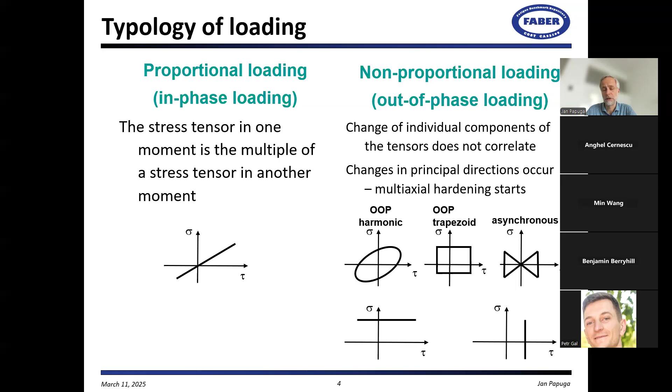This is out-of-phase loading with harmonic load channels. This could be, for example, a 30-degree phase shift between both sinus waveforms. Here you see a trapezoidal course, for example, again out-of-phase loading.

But the loading can be technically in phase, but for example, one load channel can be 2 times quicker, which is something called asynchronous loading, and this is the example here of this butterfly. But even this loading called asynchronous is something which is non-proportional, because if you try to analyze more cycles in time, you will find out that principal directions are changing during such a simple loading. Just one is static, one is dynamic, and you are getting something which is not anymore proportional.

What it causes is that the fatigue response is getting, say, weird, different. What I will be showing to you today is basically focused above all on analyzing multiaxial fatigue strength, because I deal above all with high cycle fatigue. In that moment, if we have some equivalent stress to our multiaxial loading, technically we have a fatigue curve, an SN curve. We could get to fatigue life.

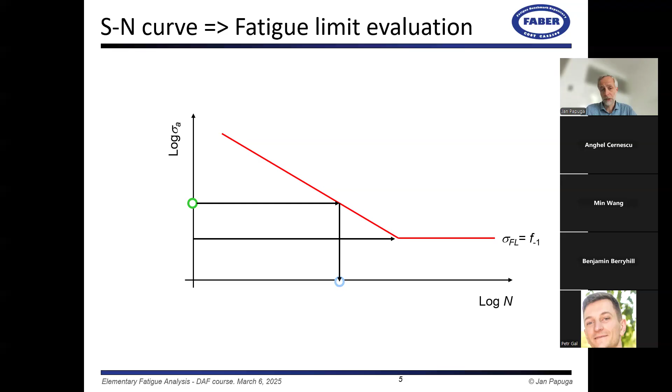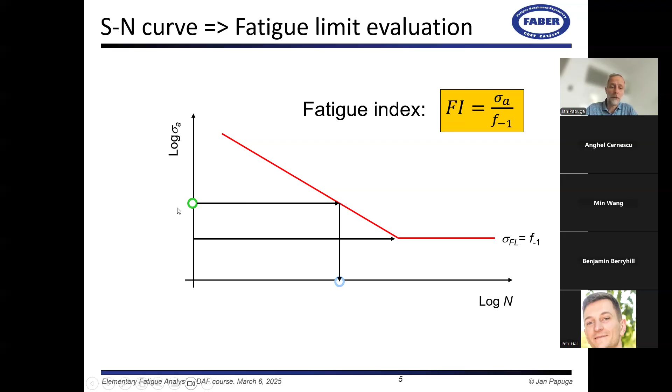But in our case, because we will deal with fatigue strength analysis, or more specifically fatigue limit, we expect that the loading which is applied to the structure will be identical to the equivalent fatigue limit. That means I will look for a case where the loading would be capable of reaching the fatigue limit. But if I miss that point, I go with larger stress amplitude. I can define something which is called the fatigue index. It's a ratio between the applied stress, some equivalent value, and the fatigue limit here.

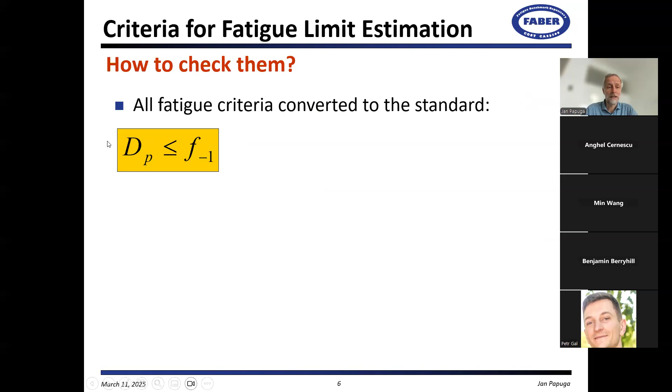Now, I will show you my experience with validating and testing very many different multiaxial fatigue criteria. For that, I had to build some practical means of comparison. So if we design to fatigue limit, to infinite fatigue life, if it exists, we are checking that this damage parameter is in some way equal to or rather lower than the fatigue limit. Fatigue limit in our analysis will be related to some kind of axial loading, usually F-1, which means push-pull, bending or rotating bending.

Now, if we use experimental data which led the multi-axial test case to fatigue limit or something resembling fatigue limit, then I expect that this damage parameter, which is a composition of different stresses usually, is identical to fatigue limit. This doesn't happen too often. It doesn't happen nearly any time.

So that means we define something which is called fatigue index error. This is equivalent stress minus fatigue limit divided by fatigue limit. This is basically a relative error in fatigue limit estimation in the direction of stresses, not lifetimes.

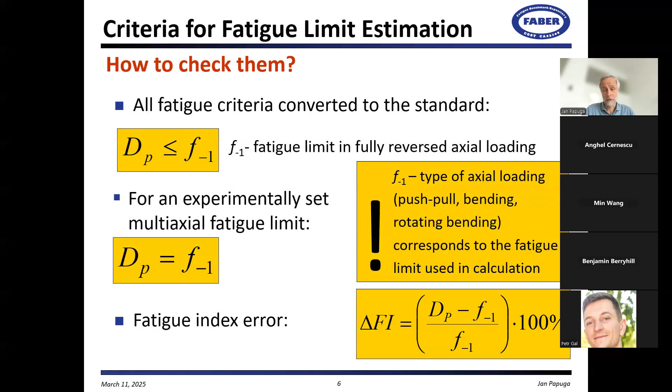Now, what we can do with that, once we have this metric of analysis, we can set across a large group of data what is its average value, what is the range, what is the standard deviation, to show how scattered the results will be compared to perfect results.

Average value is interesting. Delta FI larger than 0 will mean that the prediction is conservative. If it is smaller than 0, it's non-conservative. And this statistical evaluation can be done on different data sets.

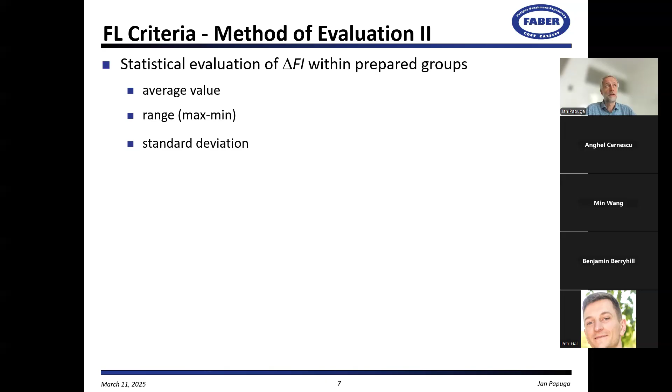For example, here you see classification of the original data set of all experiments into cases with no mean stress, mean stresses with axial and torsion loading channels active, or biaxial loading, and so on. In that way, I can compare average, range, standard deviation, and so on.

But if I look at the data overall, meaning only in this column all, I can also generate, for example, a histogram of fatigue index error. And it shows, okay, for example here, with fatigue index error between -5 and +5, I would get something like 50% of all data, of all results, of all predictions.

Technically, we would be quite happy if, based on Papadopoulos' proposal from the 90s, we could get all our prediction results to the scope of something like -10 to +10%. That would be an awesome quality of fatigue strength prediction. This doesn't happen for any criterion today.

And we are still speaking about estimation in stress direction. That means if we exceed the fatigue limit by 10%, it can have a profound implication as regards the final fatigue life, for example.

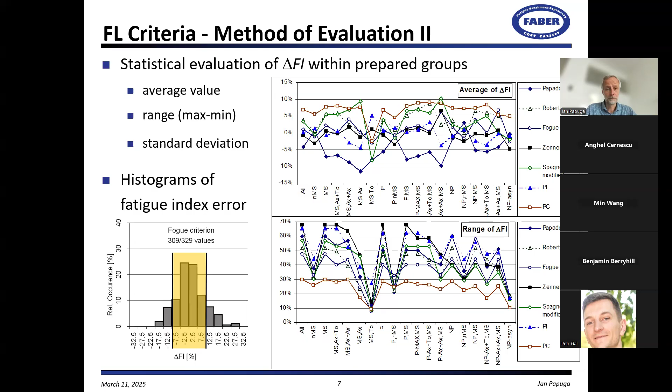Because I dealt with these analyses for a long time, I generated a website representation of all data I had at that moment. This is the PragTic experiments.php website. There is some kind of evaluator.

This is not active computation, just data from analysis in practice using different multiaxial fatigue formulas gathered here. You can use some preselection or just some of the data and look at what the response is, which can be useful for you if you have some specific industrial case to deal with.

The issue here is that this large set, something like 450 experiments, was later checked by me, and today we have a much better representation of a data set which is smaller, something like 300 data items.

Mostly because we have found out that part of this experimental data is based on experimental results provided in weaker quality.

We are not sure if there were some errors. We are not sure if there are trends which should be monitored. For example, the SN curves are built from just 3 specimens, for example. So such cases were abandoned, and today the final data set is smaller.

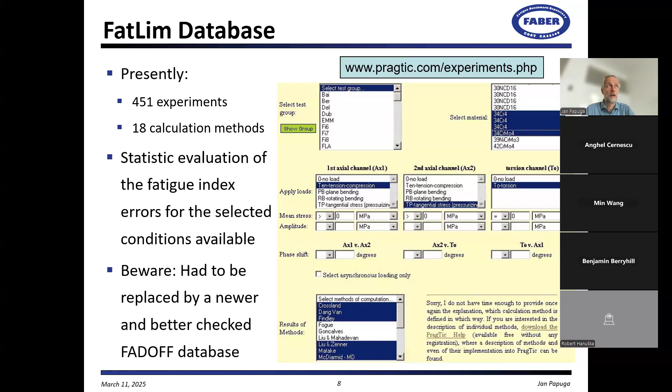Now, if we deal with multiaxial fatigue, we are looking for a way to convert the full tensor, or just 2 stress components from a tensor, to some equivalent value which we can say is equivalent fatigue strength or stress, or some compound value which I can compare with, for example, Basquin formula to get fatigue life.

As engineers, we are tempted anytime to use those simple solutions. For example, here for signed von Mises stress. Von Mises, everybody knows what this criterion is for static analysis of more complicated stress states.

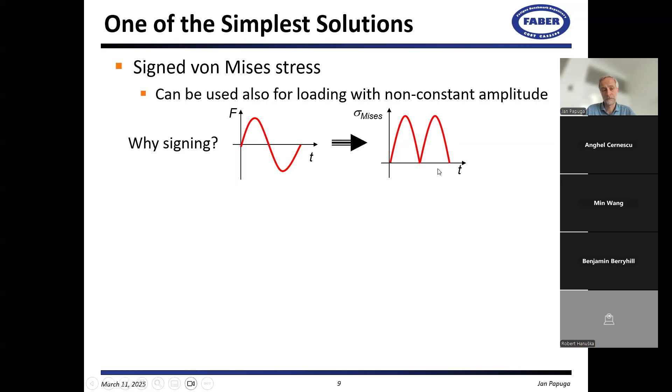The issue with it is that the product is under a square root, which means that if you apply it to a stress, to a load signal which is symmetrical around 0, we will end up with a stress signal which has non-zero mean stress and half the amplitude. So because of that, some kind of signing has to be applied.

Here you see cases where, for example, it is signed by the first invariant of the stress tensor. The trace of the matrix or tensor is computed, you check what is the sign, and based on that, you set the instantaneous value of the signed von Mises stress to some modified value with an asterisk.

In Nastran or in other cases, you can also use other ways of signing, for example, by the outermost principal stress. If it is more compressive or more tensile, you can select the sign here.

Once you have the amplitude and mean value of the stress cycle over the period, you can use some kind of mean stress effect. For example, here I proposed the Walker formula.

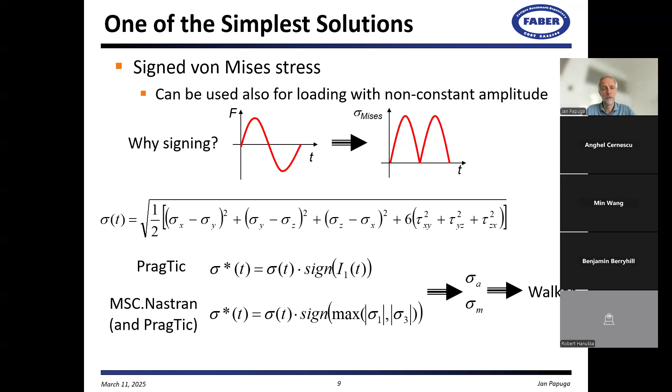And here we can see what is the general outcome. For a large data set of more than 400 experiments, we have tried to build a histogram, and you see that basically it's extremely low.

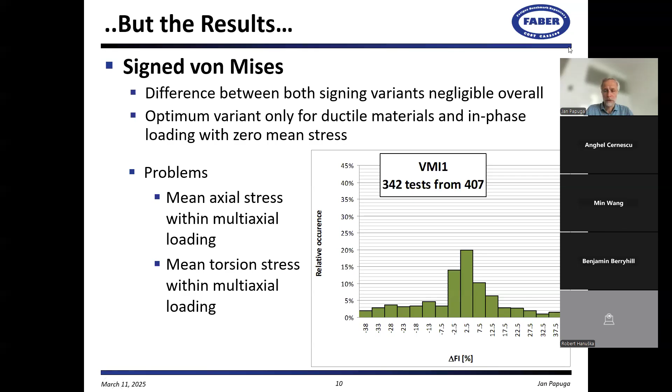For the other half of the data, about 200 specimens, we get results much more off from the perfect results. In some cases, something like 1/6 or 1/7 of all the data lies out of the box, out of -40% and +40% of the fatigue index error. That's already something not applicable. With such huge errors in stress estimation, that's basically equivalent stress estimation, nothing else. You cannot proceed with a computation on which somebody is relying.

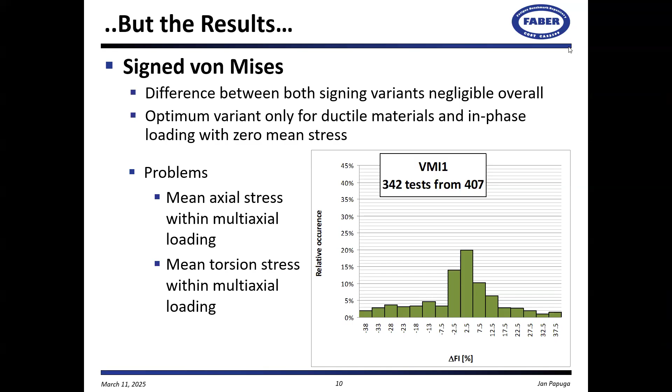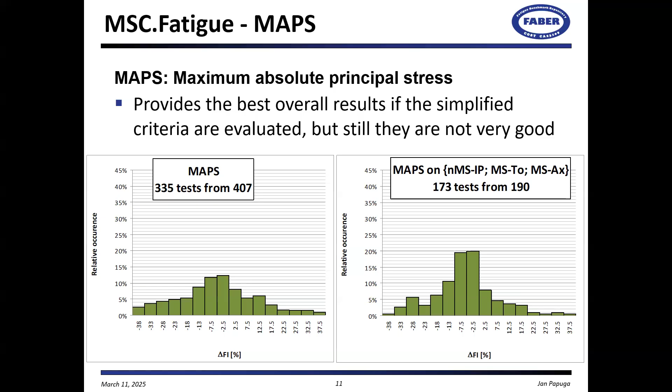Now, if we dig deeper into the problem, we can say any component, when it is loaded by a few specific load modes - this can be torque, bending, axial loading, push-pull - whenever I combine these effects, it's very likely that on the surface of the component I will get the maximum stress. So technically for me, it means that if I want to analyze the fatigue life of a component, I should focus above all on the surface.

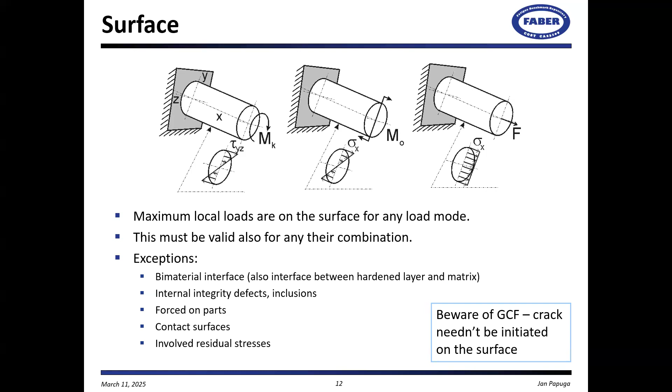There are exceptions - interfaces, integrity defects, forced-on parts because of how the surface is loaded. That means also contact surfaces, or any cases where there can be residual stresses. I also wrote to take care of gigacycle fatigue, because there the crack could be initiated out of the surface. So that means the surface is something interesting for us in multiaxial fatigue analysis.

If I check the common state when it is a non-loaded surface, it means that the normal stress in the perpendicular direction to the surface is 0. The same for shear stresses acting along the surface - here the shear stress will also be 0. So we have a plane stress state.

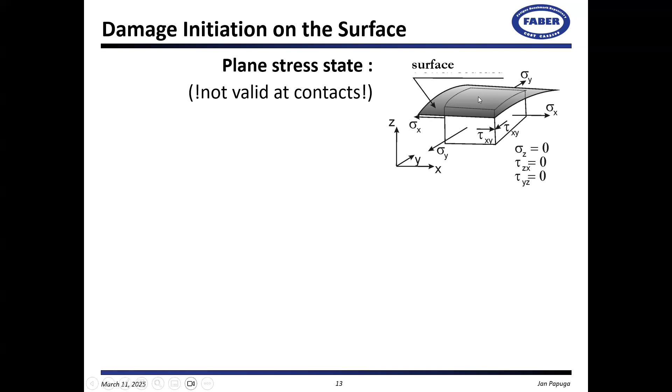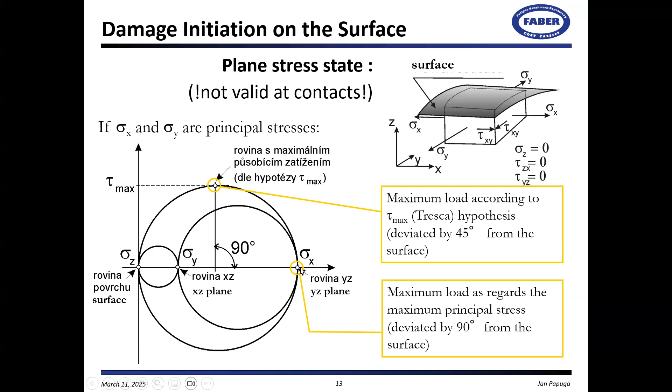So already now I have some expectation that there are specific planes where I should look for potential cracking. Because if I start analyzing, I can say that if the crack is very small, really tiny, just starting, it's of planar character. When it starts to deviate, it changes direction, but at the very beginning it's a plane.

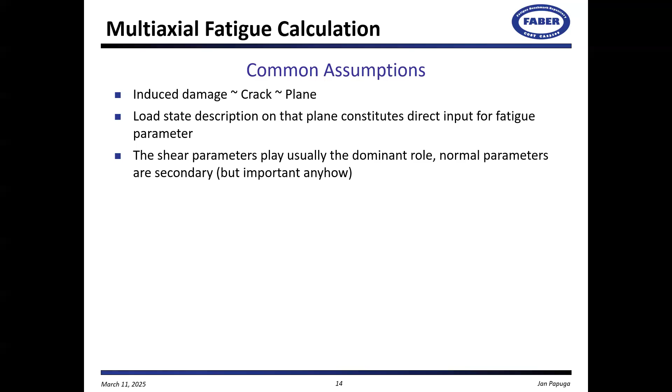That means the load state description on that plane should be the primary input for any analysis of fatigue damage. And what is important, the shear stress parameter usually is expected to play the dominant role. It is governing the crack calculation. But if there are any normal stresses acting simultaneously on that plane, they can have a secondary, still important effect.

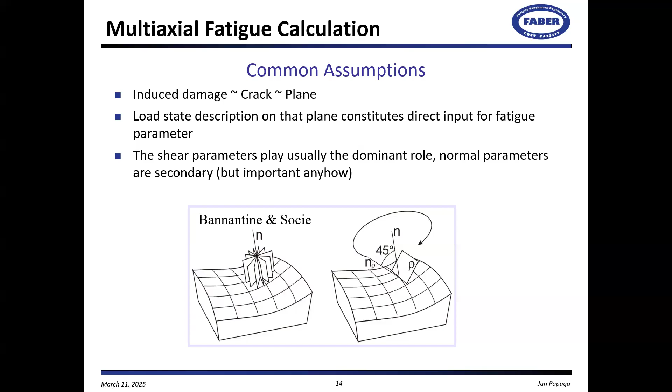Now, if I start to look at specific planes for acting stresses, again we have those two types of loading: proportional loading and non-proportional loading. For both cases, I have to split the original stress vector into normal stress and shear stress. For proportional loading, because it doesn't change direction, it means that not only normal stress but also shear stress is still running across the same direction. So it can change magnitude, but the shear stress vector will still point in the same direction or opposite.

In case of non-proportional loading, normal stress stays normal because that's by definition of the stress. But the shear stress can start to show in different directions because it changes its position or direction. And if the loading is periodical, it can happen that the endpoint of the shear stress vector will start to draw some specific closed shape. So shear stress starts to rotate.

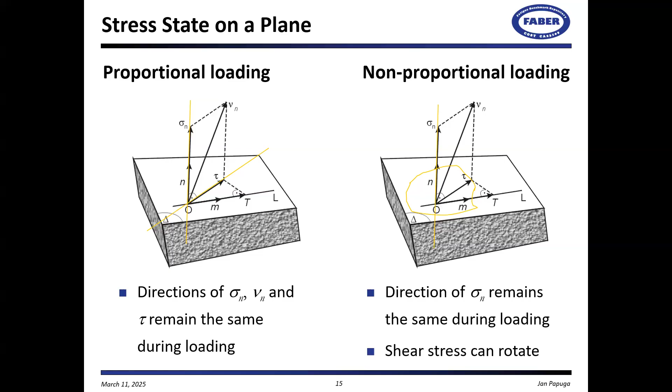And now, if you remember the previous slide, we believe that the primary role in fatigue damaging will be attributed to shear stress. It's of higher interest for us to know how to evaluate it correctly. There are different ways of solutions. This shape here is a set of endpoints of the shear stress vector.

The oldest solution was to make a longest projection method. You are simply looking at how to project this shape into a specific direction. From that, you will derive the shear stress amplitude here and here. And because this is a projection to a specific direction, only this is the shear stress mean value.

Then came a slightly better solution, because this one downplayed the role of the mean value of the shear stress. The second possible solution is to use the longest chord method. That means I'm looking for a pair of data points which produce the longest shear stress range, or half of it, the amplitude. When I find it, I say, okay, this is my midpoint, and to that the mean shear stress is pointing, meaning I can compute the mean shear stress more precisely than before.

There's a problem. There can be geometric shapes, for example isosceles ones, which produce different mean stress values based on a different chord of the same length. So today the most common solution is to use the minimum circumscribed circle method. That means you take the shape of the shear stress endpoints during the period, and you try to enclose it into a circle of the smallest possible diameter. So the radius of this circle is the amplitude of shear stress, and the midpoint of the circle gives you the mean shear stress.

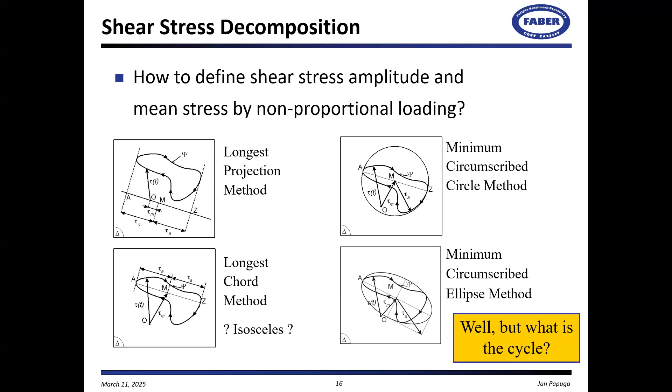The question is, I conditioned this analysis by the fact that this is periodical loading. How often in practice will you encounter periodical loading? That's not very common. It's good for experimenting, for verifying and validating methods, and so on, but in industry it's very uncommon. So the question still persisting here is how to get the cycles. Commonly in uniaxial space, we are dealing with rainflow analysis, meaning we have some continuous load history, and we will convert it into a set of discrete cycles.

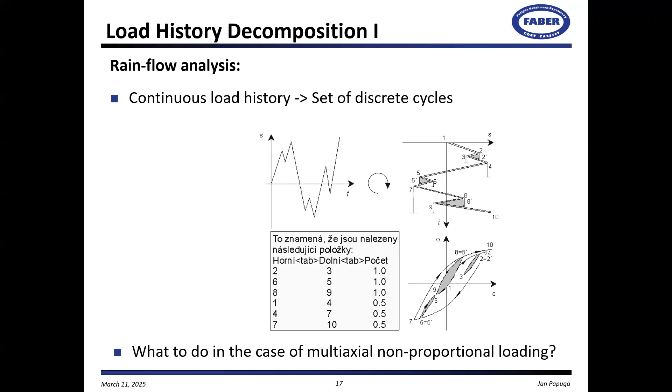The question is what we can do with non-proportional loading. As engineers, as we were prone to use von Mises solution or principal stress solution, the easiest way is to use the rainflow procedure on some projections, for example on normal stress, because it doesn't change direction, on the resultant shear stress pointing into a specific direction, or on some built-up equivalent parameter.

The question for me is, well, originally the idea behind rainflow was that in every closed hysteresis loop, we are enclosing some strain energy density, which is directly related to the damaging process. So that makes sense. But here we see projections into specific directions, and the strain energy density is enclosed just in that specific direction. The question is if the loops are closed at all, and how you recognize, in a multiaxial space of six components, that the hysteresis loop is closed.

There are more complicated methods. Currently I'm aware of two. One, a Wang-Brown solution from '96 - we tried to implement it, and we do not believe this is the best solution today, but it is the best solution because there is no other. If you are from industry, I would say that we do not have anything proven to work well for this part of the complete multiaxial fatigue strength, or multiaxial fatigue analysis, at all.

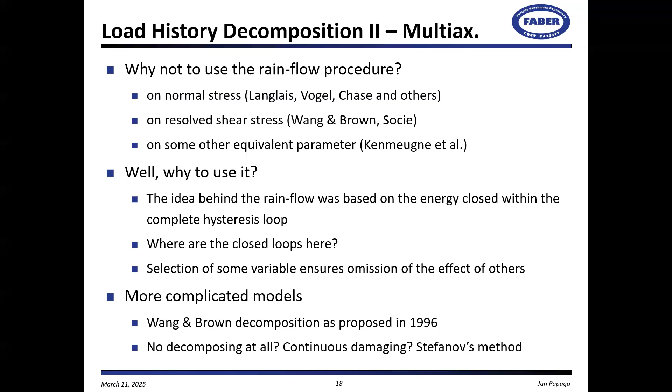So this is about different families of multiaxial fatigue criteria. One of them is the critical plane approach - basically, I check the damage parameter on different planes.

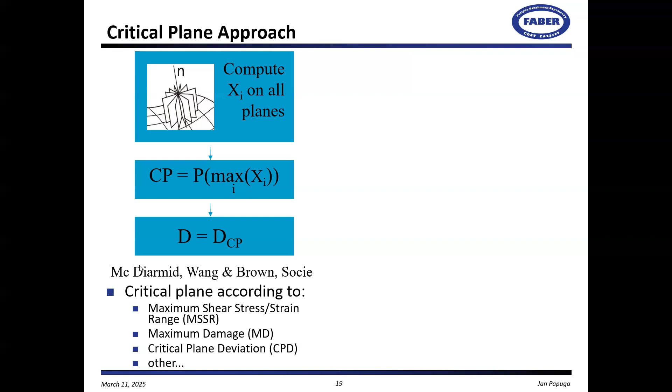There is another type of solution, the so-called integral approach. There, I compute the damage parameter, if possible, across all planes. That means I have to discretize in some way, and I make basically an average across all possible orientations of the planes, which is technically done by a space integral of all damage parameters across all planes.

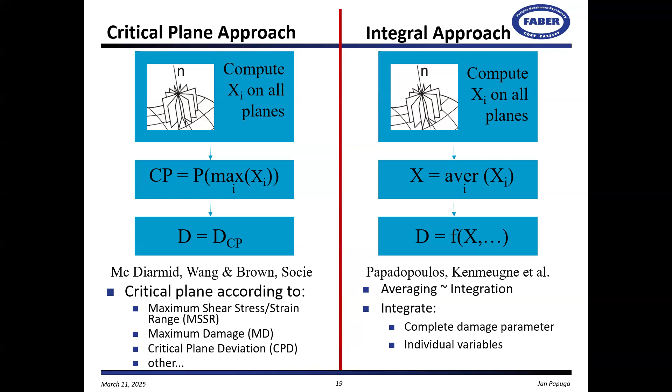There you see some proposals by, for example, Papadopoulos, Kenmeugne, and others. Averaging is basically integration. What is interesting today is that most practical implementations concern only the critical plane solution. The integral approach is still mostly related to research, and nobody is trying to implement it. My question for a long time was: why is it that way?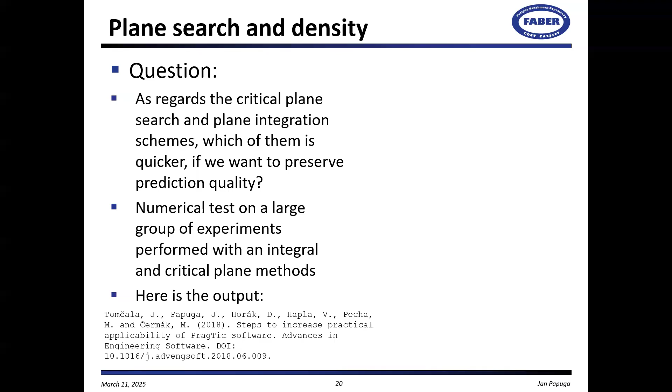We dealt a lot with that question, and at one point we did a comparative analysis, because for both concepts you have to go through different candidate planes. In one case, you are simply looking for a maximum value. In the other solution, you are integrating every other occurrence of the plane result with the previous values - you are averaging the content.

My expectation was that people can imagine the search for a critical plane solution is something easily optimized - you do some pre-scan, then dig deeper into positions where you see the current maximum, and based on some gradient approach, you can get to the peak, to the critical plane. For the integral solution, I cannot simplify it in any way - I should go through all the pre-selected planes and integrate everything together.

So I expected the reason why everything implemented today is the critical plane solution is because people expect the integral solution to be more complicated in terms of the requested time. We did this analysis with all the data we had, and here are the most representative test cases.

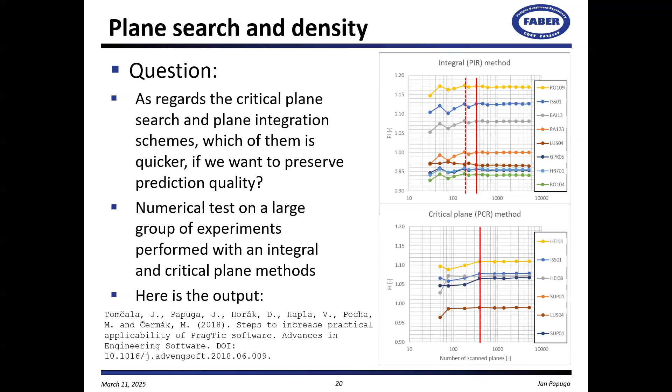Now, if we compare the critical plane solutions, the most frequent families of criteria are questioning what is the way to describe the plane as critical. One of them is to look for maximum shear stress amplitude. So I'm not looking for a damage parameter or some equivalent stress, I'm simply looking for a plane where there is the maximum shear stress range or amplitude.

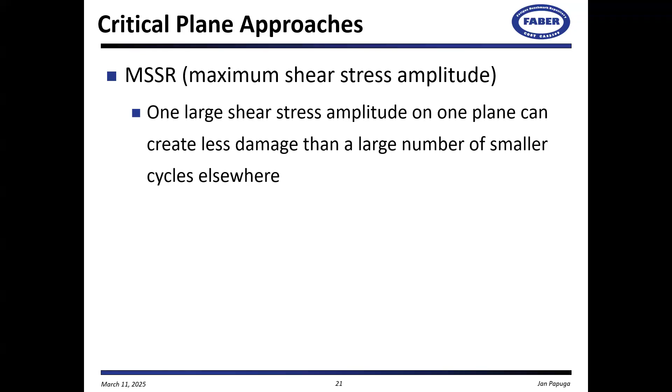The issue is that one large shear stress amplitude on one plane can be less damaging, the damaging effect can be much worse if I create less damage on another plane just slightly aside, but with many cycles. So for me, this concept is to be abandoned, despite that many people use it.

The other solution is maximum damage analysis, which looks for maximum damage parameter across all possible candidate planes. For me, this is the only acceptable solution because it's more realistic.

Anyway, if I compare a critical plane approach and integral approach, it's fascinating that they have such different philosophy. In critical plane approach, I'm looking for a shear maximum, only the maximum value is of interest for me. In integral approach, I integrate the damage parameter across all planes. So one would expect that the results of both types of criteria would be substantially different, at least for some cases. And I have to say that until this moment, we haven't found this distinction. If you have a properly set critical plane approach, you can get a very similar quality of overall results as for integral approach.

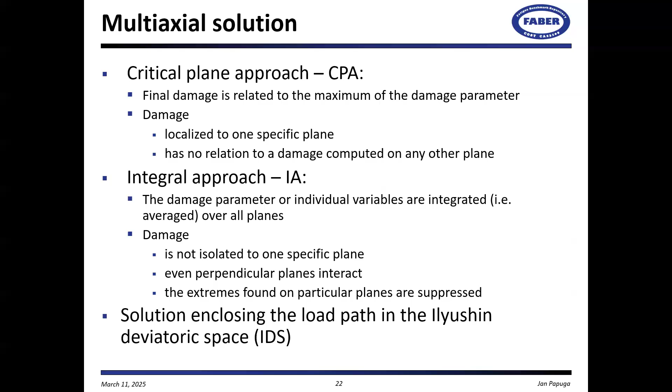That's something which is surprising and a bit bewildering. Then there is a third family of criteria which is based on enclosing the load path in the Ilyushin deviatoric space. I will explain it.

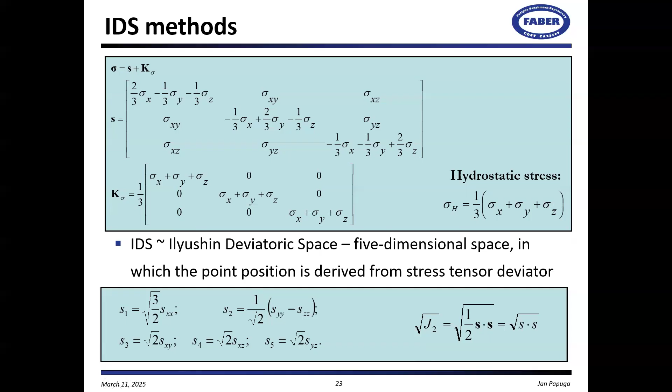You can split the stress tensor into two parts: one is hydrostatic stress, and one is deviatoric stress. If I transfer the deviatoric stresses to a 5-component space, as defined here, called Ilyushin deviatoric space, I can combine this second invariant of shear stress deviator with the hydrostatic stress in some way, in some weighted addendum, and use this as a criterion of fatigue strength analysis.

The advantage of this solution is that the critical plane methods and integral criteria require you to deliver results on very many candidate planes. If you have to use the minimum circumscribed circle algorithm, this is again some optimization routine, and it costs you a lot of time. But with Ilyushin deviatoric space, you have to use, for example, the minimum circumscribed hypersphere method algorithm, and you have to run it in 5D, in 5 dimensions.

But this is a common procedure which is simply mastered by computer, and you have to run it just once, compared to previous hundreds or thousands of evaluations in the previous case. So it's a much quicker solution if it would work well.

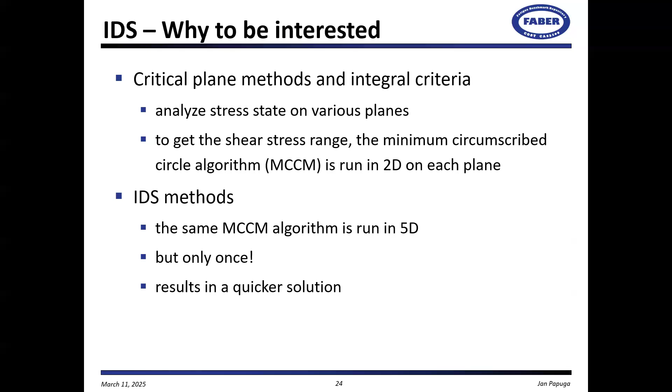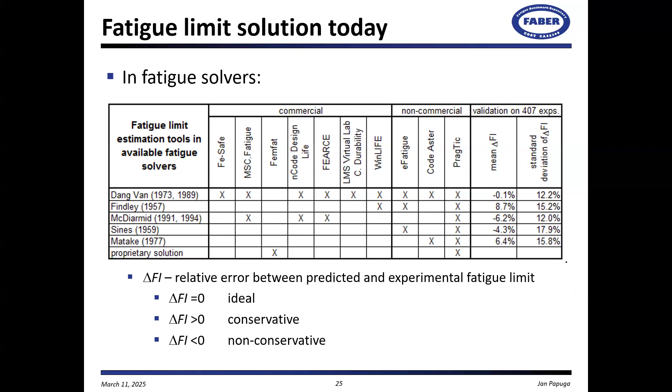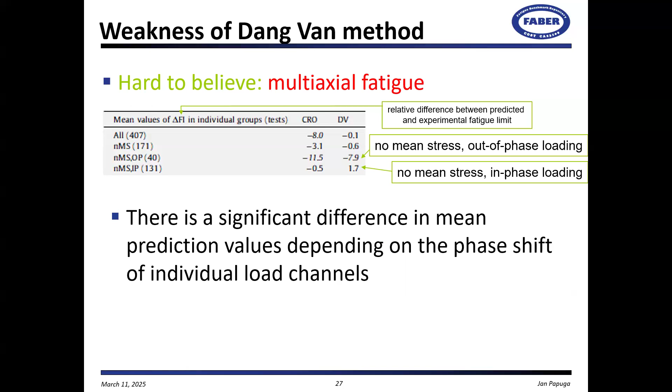And that's surprising. This should be a common tool for multiaxial fatigue analysis, but if you apply the basic condition of out of phase loading, you are generating substantially non-conservative results.

When I was presenting my analysis validation of different multiaxial fatigue strength criteria in Milano, 2009 or 2010, a colleague from there, Mauro Filippini, came to me and told me he knew about a perfect criterion from America: Manson-McKnight, which has very similar results to Dang Van.

So when I returned home, I checked that. It's basically very simple, technically a von Mises criterion, if you see that. But this von Mises criterion is not evaluated in every instant. Instead, you have to know what the cycle is. If you know where the cycle starts and when it ends, you run the analysis to get amplitude and mean value of every stress component separately.

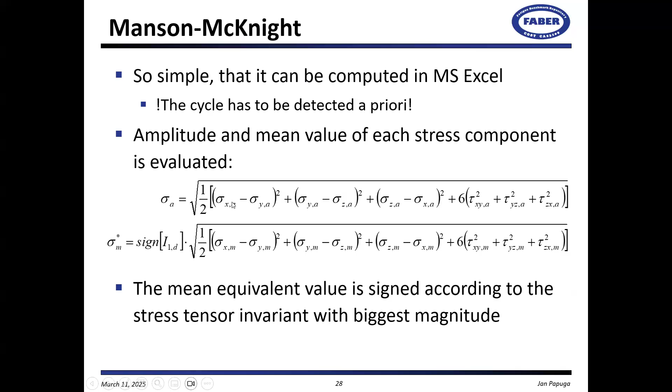And then you build the composite amplitude and composite mean value from these components in amplitude and mean values. And here you see the results - this is a comparison of the histogram of Dang Van and of Manson-McKnight.

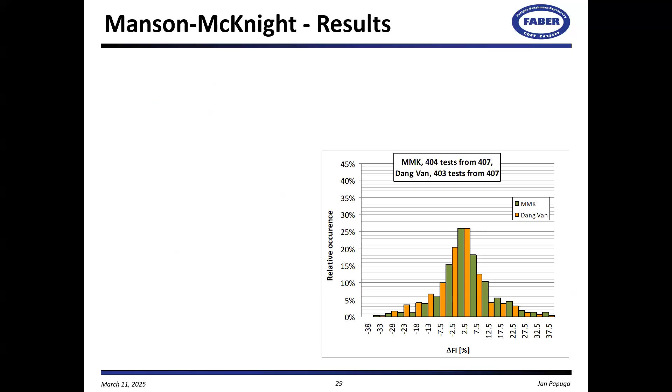Dang Van asks you for a quite tedious iterative algorithm, something to be implemented. Manson-McKnight can be solved in an Excel spreadsheet without a problem. Dang Van asks you for your time, or for 5,000 euros to buy it somewhere. Manson-McKnight doesn't ask for anything - well, you have to buy a spreadsheet calculator.

So technically, it's much better than signed von Mises stress, but it has some weak sides, some disadvantages, and you cannot know them unless you have a proper validation basis and benchmark set.

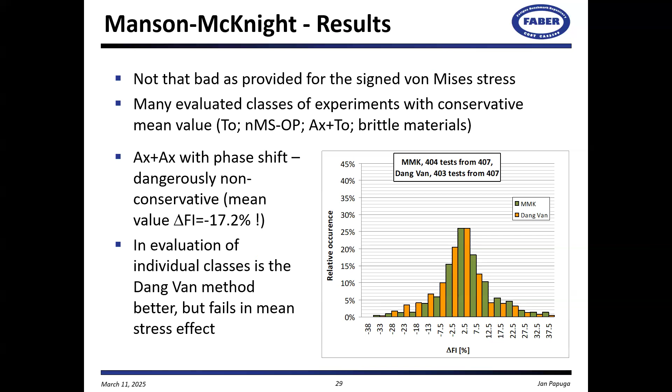I had that benchmark, so I ran analysis comparing Dang Van and Manson-McKnight in mean values, in ranges. This is the difference between both values in all cases, in ranges, in standard deviations. And based on that, I could see that in some cases, Manson-McKnight was a perfect solution.

For example, here I have a biaxial loading without any phase shifts. There, if I use Dang Van, I will be completely conservative in mean value, and I will have a large standard deviation in addition to that. But if I use Manson-McKnight, I get a moderate mean value of the fatigue index error, and much lower standard deviation.

So technically for pressure cylinders, it's a perfect tool without the need for very specific complicated fatigue analysis. But if this pressure vessel was set, for example, to move and generate more different load cycles - not just the pressurizing itself - you see that if I use the same concept of biaxial loading with non-zero mean stress and in addition with phase shift different from zero...

...Manson-McKnight criterion quality deteriorates very quickly to very ugly non-conservative mean values. And in that moment, I would be happy to pay for Dang Van to have it completely correctly solved.

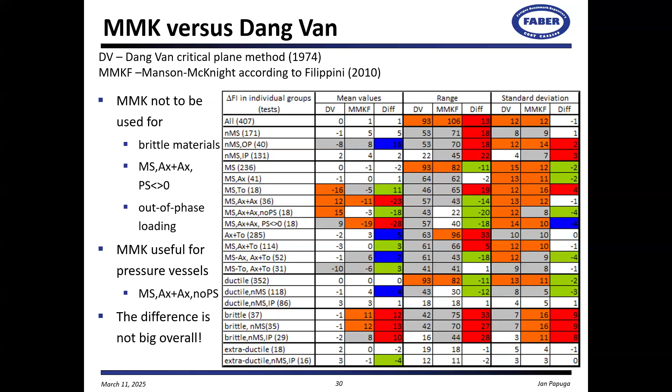So, well, Dang Van is today something to be implemented, something implemented everywhere. And the question is, if we cannot get better results. Just a small deviation here.

We tried to propose a better solution to supersede Manson-McKnight by the MMP criterion. You see that we end up with different results. But one of the guys here in this meeting has a much better solution, but he still didn't proceed to publishing it.

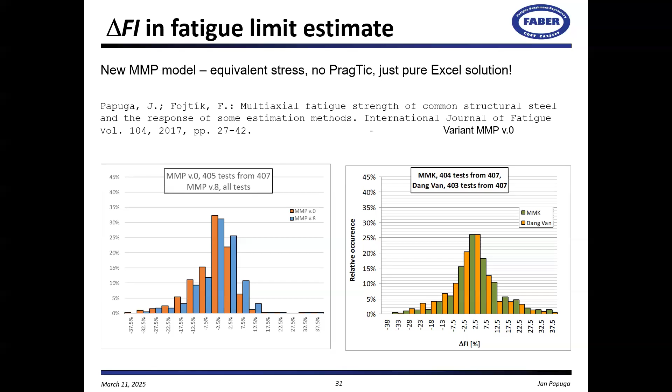Now, I just wanted to quickly go through other histograms of other criteria implemented today. This is McDiarmid. It's a combination of shear stress amplitude and maximum normal stress with some weights added in addition. And there are two different implementations: you can use it as a maximum shear stress range criterion or the maximum damage criterion.

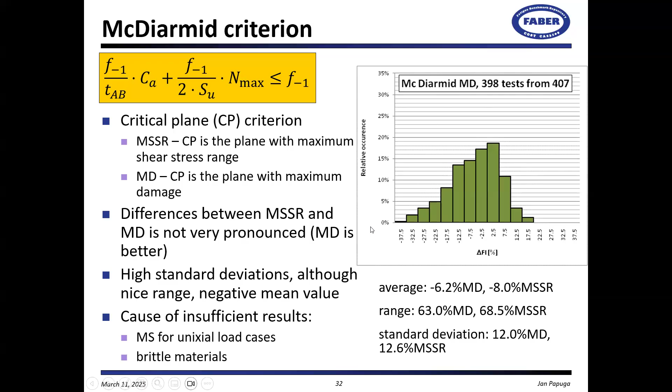Here you see the results of damage, which are better - maximum shear stress range, and here you see the parameters. Technically, it has better standard deviation than Dang Van. It has much smaller range, but you see that its average value is skewed to the left side, so it's more non-conservative than we would like to have it.

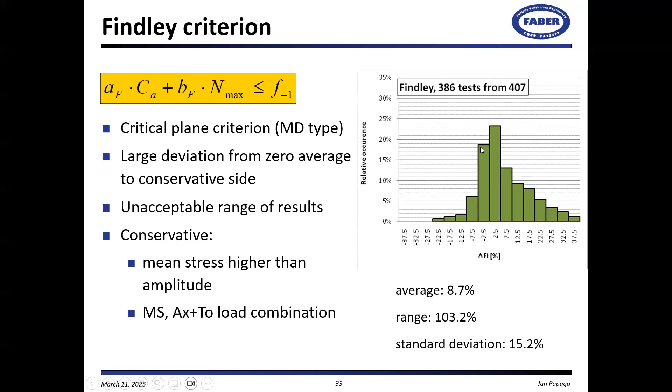And you see the results. I would say quite similar to McDiarmid, but with smaller standard deviation, but also again with two non-conservative mean values.

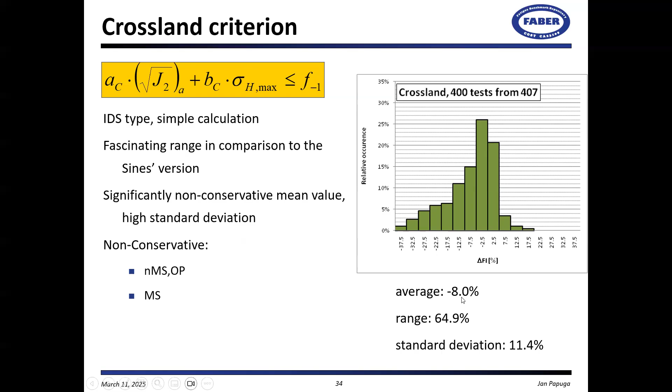And here you see something completely different. This is a criterion which I proposed now already 17 years ago. And I guess you immediately see that we are getting to standard deviations which are half of Dang Van's method. The range is also awesome, average very nice.

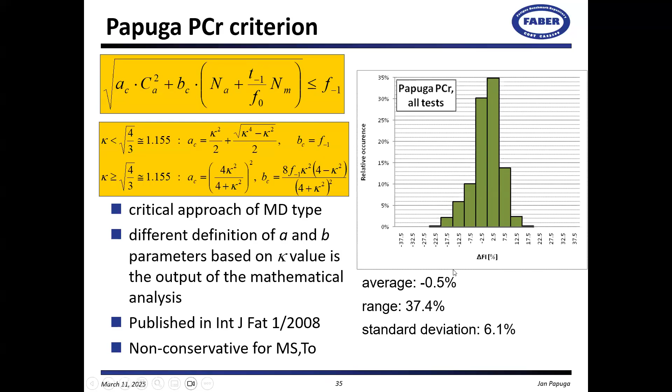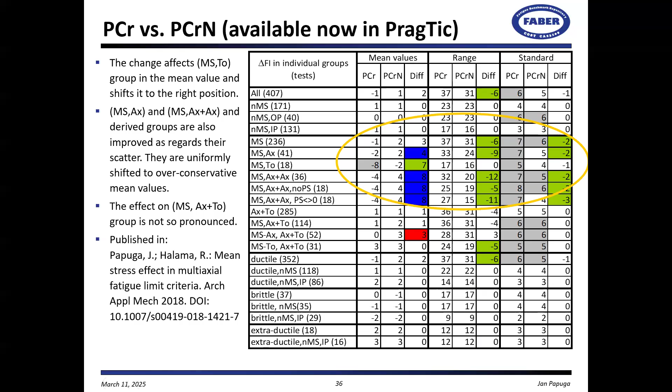It has some weak points, I will mention it later on. Meantime, we published here in this paper even an improvement, which allowed us to get to a standard deviation of 5 for the whole set, and to a range of results of 31%. So I was quite happy with that.

But a colleague of mine, André Böhme from Norway, came to me with a proposal for a joint paper, and during the discussion, he found out a bug. So whoever would like to use PCR or PCN criterion, take care.

Here you see common multiaxial load combinations for data tested by Anes and Reis. What he defined here as augmented sets is basically push-pull loading, the first case, augmented one, which is decreased to half of the fatigue strength, of the fatigue limit. So that means we would expect that with this loading, the criterion should result in 0.5 in fatigue index.

And then he did it with shear stress loading. Again, this is half of the shear fatigue limit. And then he did it in the opposite direction, and he multiplied by 2 and 2. And here are the results.

For Dang Van criterion, these augmented sets generate fatigue index error of 0, 0, 0. But here with PCN, with that criterion of mine, we are getting to very non-zero values. And the same with an integral criteria PIN.

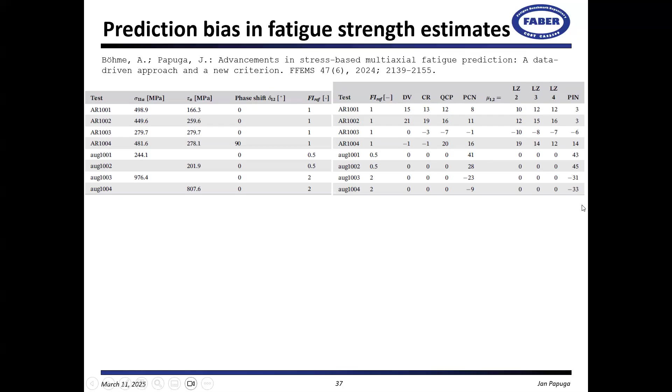The reason is here. In this square root, in this formulation, you see that we have a quadratic section of shear stress amplitude and a linear value here. Because this is linear, it means that the BC parameter is not unitless, but it has a meaning of stress. This is unitless, but this is stress. And specifically for this formulation, it's directly equal to the fatigue limit value.

And now imagine what happens if I put this, I will invent a new formulation where there is a square root here. That means in that moment, BC will have to replace the missing stress, and it will be a quadratic value. Oh no, something more ugly. It will not be even quadratic, but something related to the square of the original material parameters.

And that's the issue, because in that moment it means that this material parameter helps the criterion reach perfect unity. The deeper I would go, the more different this would be as regards the power over this parenthesis, the more affected BC would be, which would be in that moment more identical to what I request.

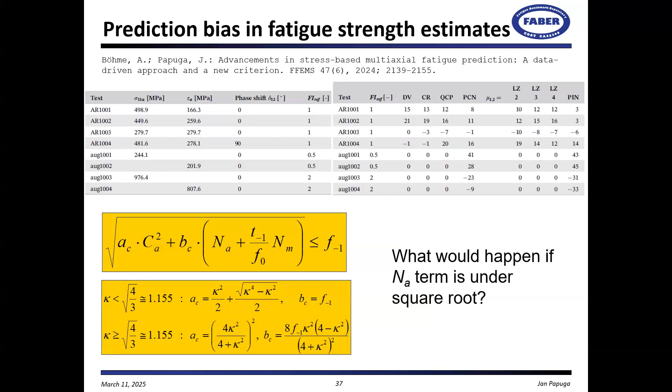To get out of the problem, I had to resort to another criterion of my provenance, which is a bit worse, but it doesn't suffer from this prediction bias. You see here, this is QCP. It doesn't suffer from that simply because this is a quadratic formulation of shear stresses and quadratic formulation of normal stresses. And yeah, the range is bigger.

Standard deviation is about 6.7 compared to Dang Van's 12, but you see it's definitely better.

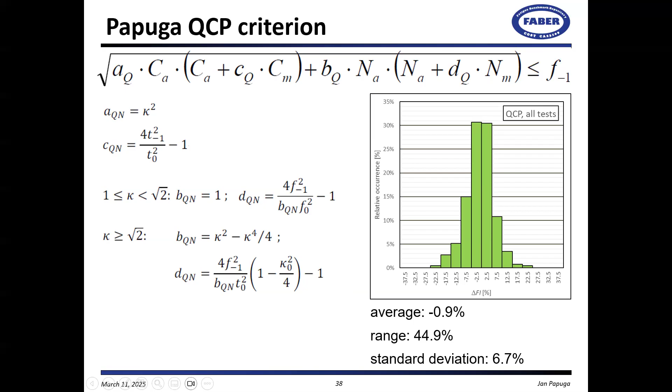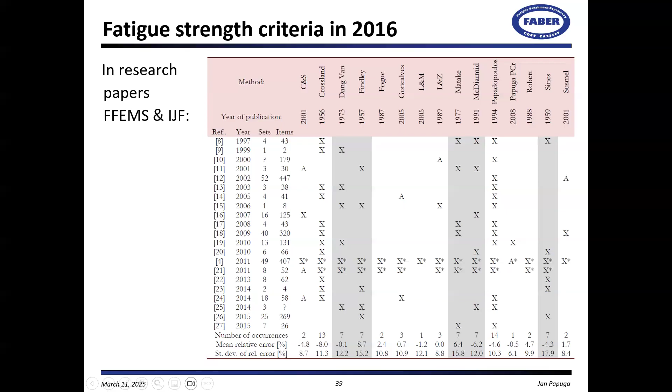Technically, those which are today represented in practice, which are provided to engineers to be used, provide the worst results overall because the standard deviation here is not beaten by anything else. It's the worst one. Maybe here, the Liu and Mahadevan criterion from 2005 has similarly bad results. And it's something very surprising.

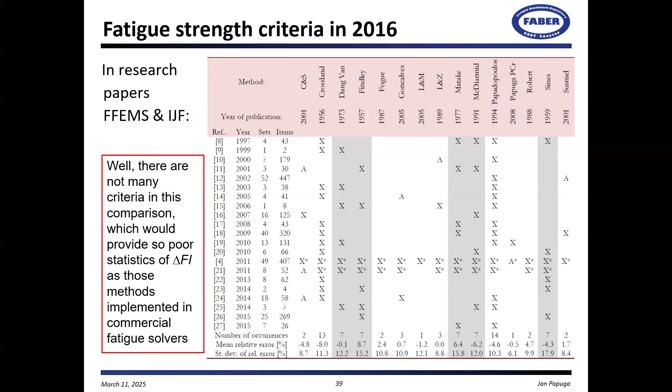And this is also the reason why I initiated Project FABER, because we need to make the fatigue estimation more reliable.

Meantime, in previous years, we have published, for example, a shortened benchmark set. If you would like to invent a new criterion, go forward. But I recommend you use this because there is a complete data set of about 50 data items which you can use to try to propose something new regarding fatigue strength estimation.

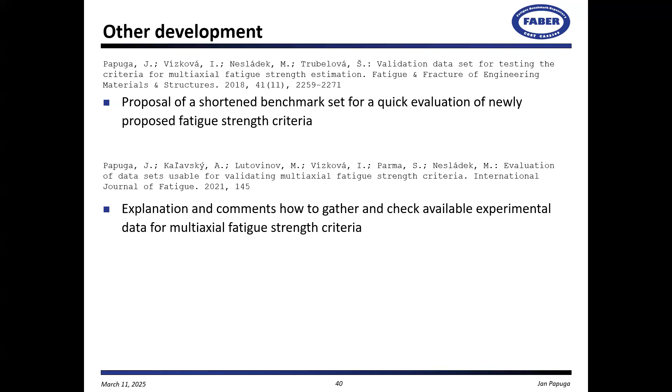Here we have published very many explanations and comments regarding multiaxial fatigue analysis, how to benchmark the data, what are the good data sources for analyzing. But anyway, if you would be interested in that topic, I would recommend you join the FABER consortium. This is the best solution to get this data set because I will publish it there.

Oh, sorry, what's happened? And there is some bug.

So again, the same situation happens. If I have a properly set damage parameter, I can get very similar quality of prediction results if I use an integral solution or a critical plane solution. I have to say, for me, this is a bit desperate situation because it shows me that basically we are still just curve fitting.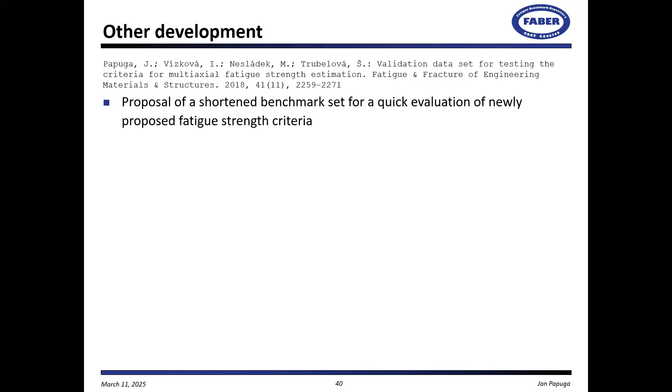We are just trying to get the best possible solution for a given data set, but it's not related at all to the real description of how the damaging is induced in the structure. It's just a quick engineering approach, not big science.

What I wanted to mention here as well is another analysis which we published. For a long time, when I was above all dealing with my PhD thesis, I was surprised by people who tend to say contradicting expectations. Some of them said that if I have in-phase loading with given normal stress and shear stress, and I use the same stress amplitudes also when the loading is dephased, for example here with a 90 degrees phase shift, I should get lower lifetime.

Now I should get higher lifetime. And well, it was obvious that there is no consensus.

I have tried to gather from my experimental data, or from those which I gathered, to see what is the response if the theory is that dephasing of the load signal extends fatigue life or shortens it.

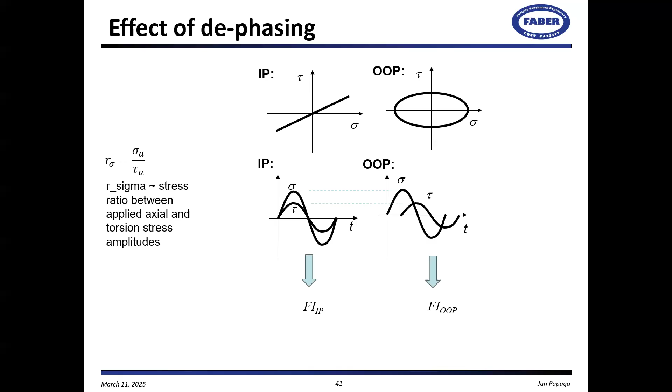But I have found out that the experiments are on both sides of this. In some cases you can get longer lifetime because you have a phase shift between both load channels. In some cases it's vice versa.

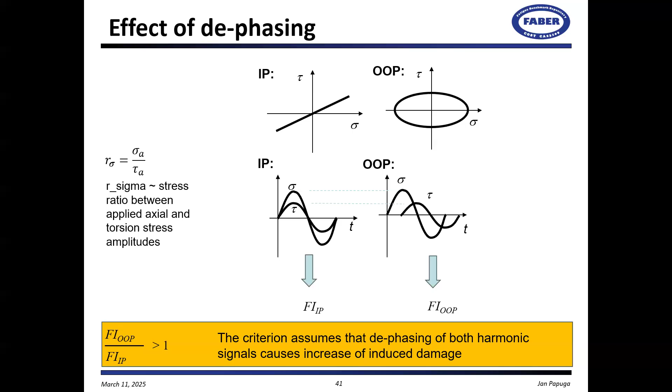And here, just for you to understand, I built a metric which says, okay, fatigue index obtained for out-of-phase loading with the same amplitude, compared to fatigue index obtained in in-phase loading. If it is higher than 1, what does it mean? It means that the dephasing of both signals should increase induced damage. So that's the interpretation.

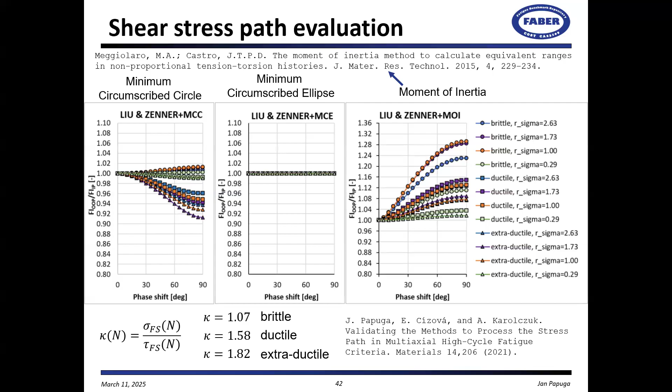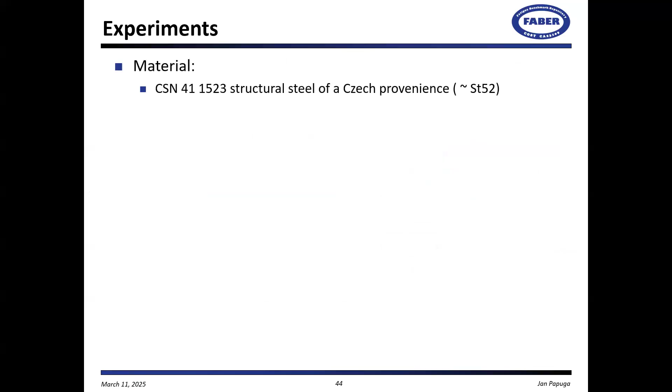Here, just shortly, I will make a short look into low cycle fatigue, just for you to understand, because the concept is still the same. Here is a description of the test which we use for some initial validation. I must admit that low cycle fatigue is not my cup of coffee.

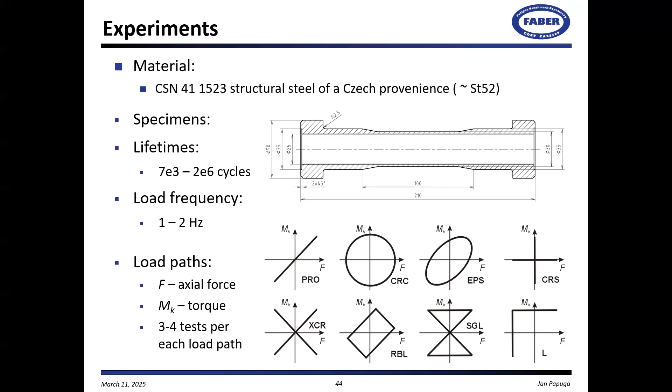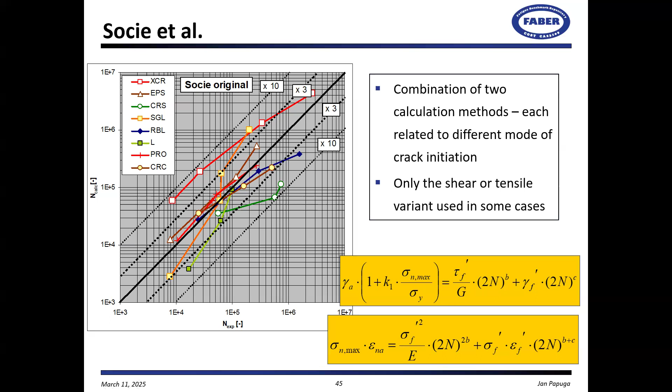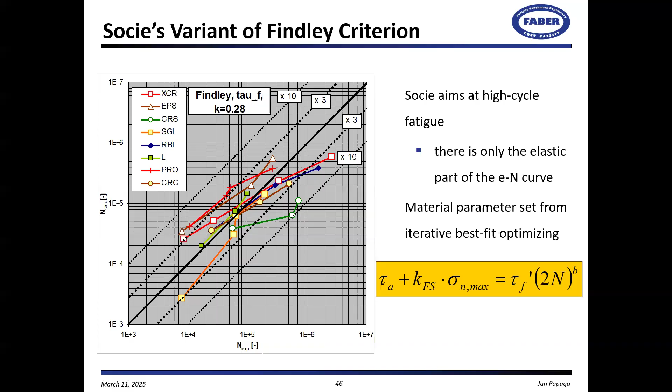But definitely the data does not follow our expectation. We are out of the bound of typical publications by a multiple factor. So Socie's model is nothing special, it's again the same concept of critical plane. Here he proposes, for high cycle fatigue cases, something which is technically the Findley criterion, nothing else. It's again the Findley criterion, a combination of shear stress amplitude, maximum normal stress, related to the Basquin formulation of shear stress controlled loading. Nothing very special.

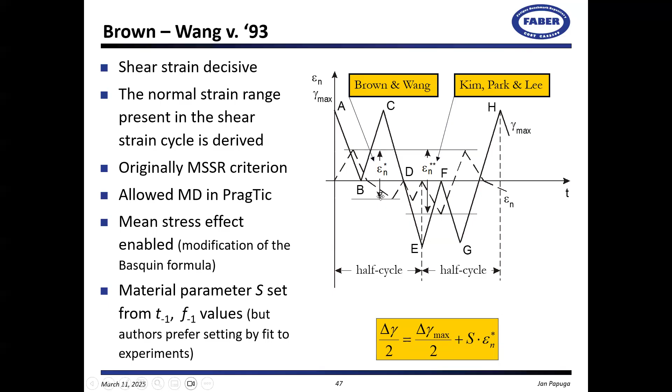There is a modification by Kim, Park, and Lee on the right side, where they believe that instead of checking the effective normal strain just over the half cycle, you should do it across the whole cycle. Technically, for the data which we had, they are a bit more effective. That's all - basically it's not that different from high cycle fatigue analysis, just using strains, which makes everything much more complicated, it's true. But otherwise, there is nothing very special.

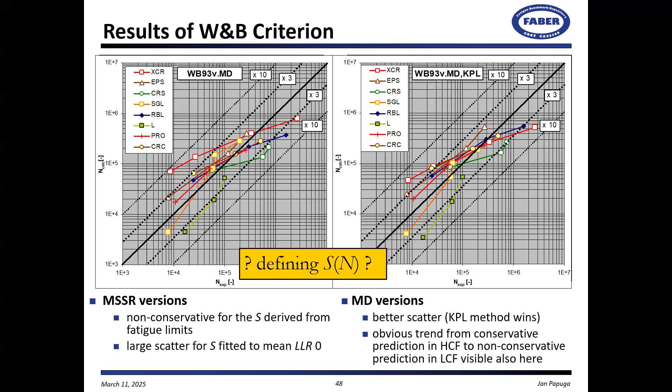The critical plane solution is leading here. I'm not aware of any integral type definition for low cycle fatigue analysis. So if I try to sum it up, multiaxial fatigue analysis is interesting, but it's here for a relatively short time. There are many more interacting effects - I mentioned just one of several of them.

Take care, for example, of shear stress path analysis - that's something which was not understood 5 years ago, that there is an issue. The numerical analysis is much more complicated. It's still unclear to which concept to relate the damage initiation, and why integral methods and critical plane solutions provide the same quality of results if properly tuned. There is a vast number of criteria. We have published another paper summing up some recent 6-7 criteria, saying the older ones are technically better.

And still, despite this lack of quality, industry needs that, or would like to have something, because it's not just about multiaxial loading. It's also about analysis if you are using finite element data, and there, in any notch, you have a multiaxial stress state. So to have a proper solution for multiaxial fatigue analysis is of quite big interest.